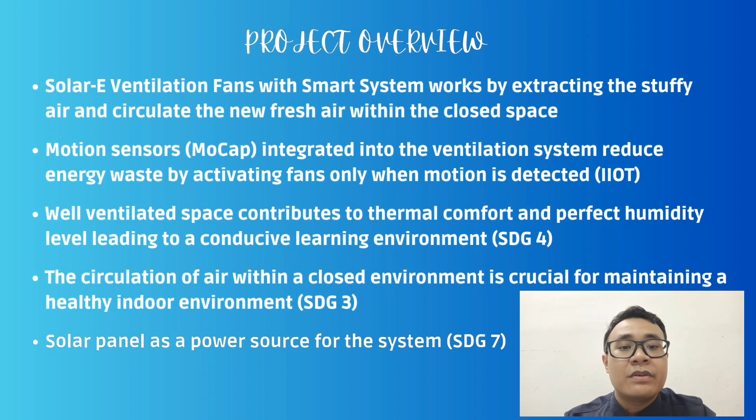To address the concern about energy efficiency, we also incorporate a motion sensor, or MOCAP, into our solar e-ventilation fans. Additionally, these fans also utilize solar panels as their power source, aligning with SDG Goal 7, affordable and clean energy.

Good day, doctor. I'm Sangeet and my matric number is 21110768. I would like to explain the problem statement according to research that has been done regarding the ventilation system in MASDAR mini library. MASDAR mini library presents several significant challenges that need to be addressed.

Firstly, MASDAR mini library has a louver type window for natural ventilation. The conditioned air from the air conditioning system will escape through the open windows, leading to insufficiency in cooling the space. This results in wasted energy and increased electric bills for MASDAR management, as the AC unit works harder to maintain the desired temperature.

The existing ventilation system is outdated, resulting in insufficient circulation and filtration. Additionally, there have been reports of poor air quality, which has thus accumulated musty odors, particularly in less frequented areas of the library. Moreover, the compact layout of MASDAR mini library poses constraints on available space for installing a ventilation system. With limited space, finding a suitable location for equipment placement becomes challenging.

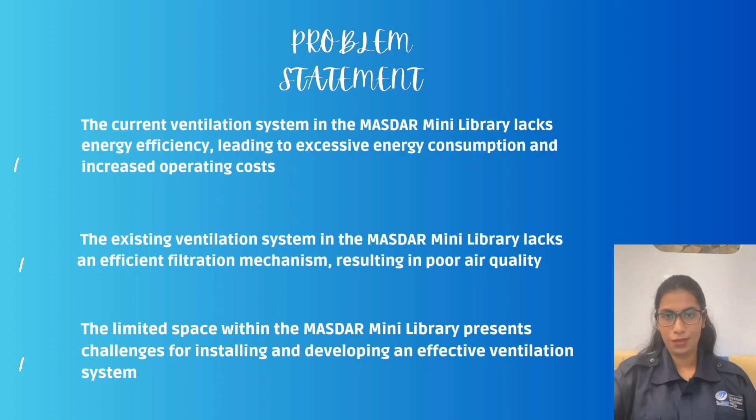Thank you. My name is Navnithan, son of Karimutu, matric number 21113313. Today I will explain the objectives for our product. The first objective is to develop an energy efficient ventilation system to reduce excessive energy consumption and operating costs.

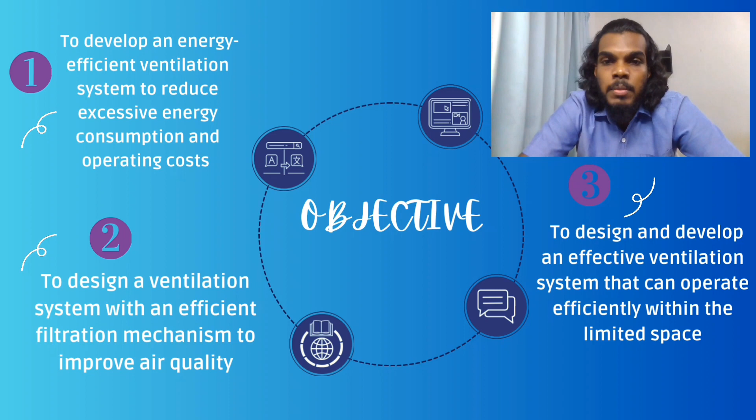The second objective is to design a ventilation system with an efficient filtration mechanism to improve air quality. The third and last objective is to design and develop an effective ventilation system that can operate efficiently within the limited space.

Now I will talk about the scope for our product. The first scope is that the ventilation system is powered by solar energy. The second scope is to improve air quality in the mini library to create a healthy and pleasant environment for reading and studying. The third scope is to maintain a comfortable temperature for librarians in the mini library. The last scope of our product is that the total square footage of the library space will influence the amount of ventilation needed.

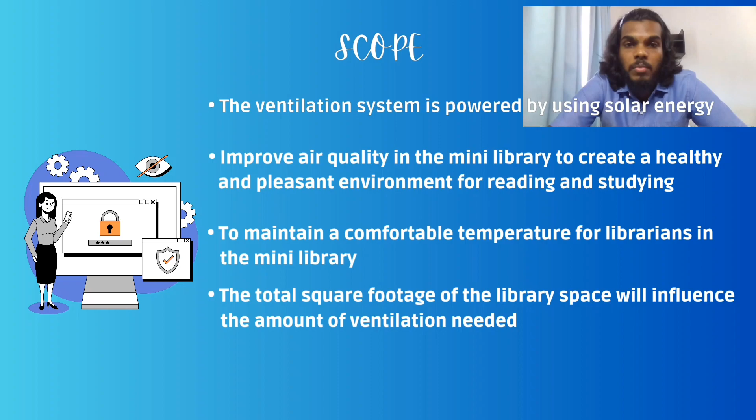My name is Nur Nadila Hani binti Razali. I want to explain about existing products. The first product is the KDK glass mount propeller fan, and it exhausts pollutants directly outside before spreading them throughout the rooms. The model is 20WUD, the voltage is 220 to 240 volts and it operates at 50 Hz.

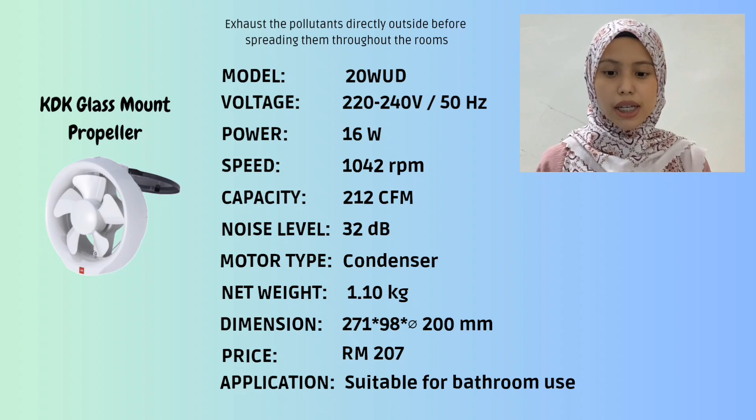The power is 16 watts. The speed is 1042 RPM. The capacity is 212 CFM. The noise level is 32 dB. The motor type is condenser. The net weight is 1.1 kilogram. The length is 271, the width is 98, and the diameter is 200 millimeter. The price is 207 ringgit and it is suitable for bathroom use.

The second one is the KDK ceiling mount propeller. It is installed on the ceiling to provide effective air circulation throughout the area. The model is 20TGQF. The voltage is 220 to 240 volts and it operates at 50 Hz. The power is 20 watts. The speed is 1250 RPM. The capacity is 312 CFM.

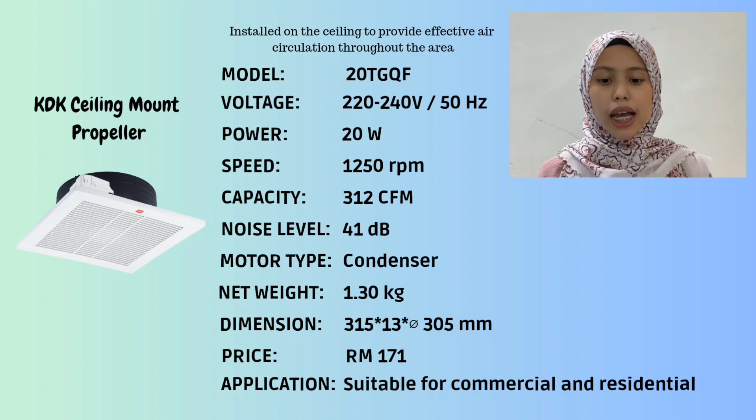The noise level is 41 dB. The motor type is condenser. The net weight is 1.3 kilogram. The dimension, which is the length, is 315 millimeter. The width is 13 millimeter and the diameter is 305 millimeter. The price is 171 ringgit and it is suitable for commercial and residential use.

The last one is the KDK glass mount propeller. The ventilating fans keep air circulating in rooms, exhaust contaminated air, and remove offensive odors. The model is 20AQM8. The voltage is 240 volts and it operates at 50 Hz. The power is 18.3 watts. The speed is 1301 RPM. The capacity is 318 CFM.

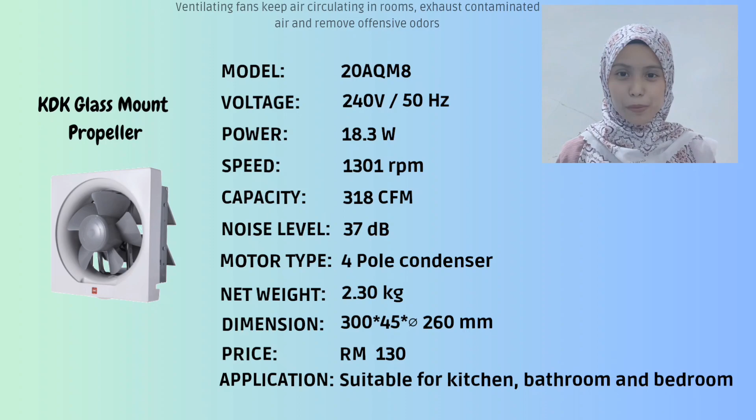The noise level is 37 dB. The motor type is 4-pole condenser. The weight is 2.3 kg. The length is 300 millimeter. The width is 45 millimeter and the diameter is 260 millimeter. The price is 130 ringgit and it is suitable for kitchen, bathroom and bedroom use. In this market survey, we got about 50 respondents.

In the first question, 31 of the respondents agree that fixed ventilation systems are effective in improving air quality and comfort in the library. However, 18 of the respondents are neutral and one respondent disagrees about the fixed ventilation system.

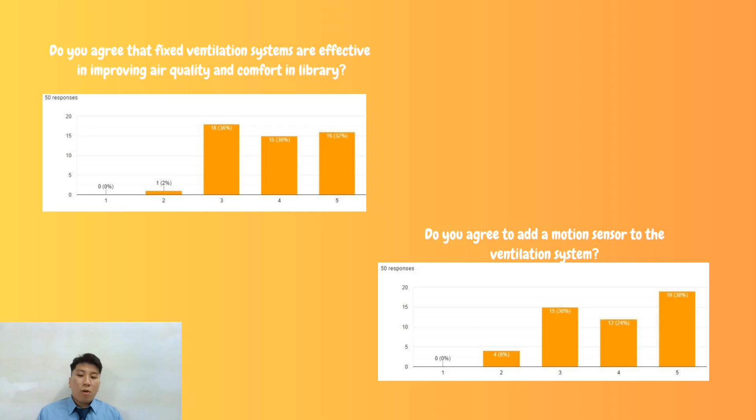For the second question, 31 of the respondents agree about adding a motion sensor to the ventilation system, followed by 15 neutral and 4 who disagree about adding the motion sensor.

For the third question, 36 of the respondents agree that solar energy should become the power source for the ventilation fan in the library. Only 14 of the respondents are neutral with the suggestion.

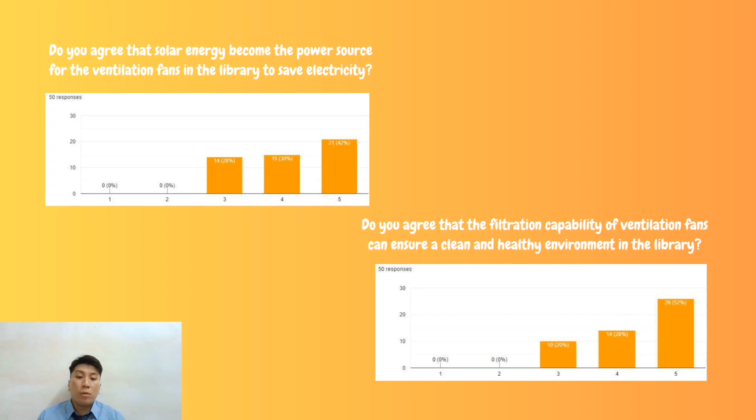For the fourth question, 40 of the respondents agree that the filtration capability of the ventilation fan can ensure a clean and healthy environment in the library. Only 10 of the respondents are neutral with the suggestion.

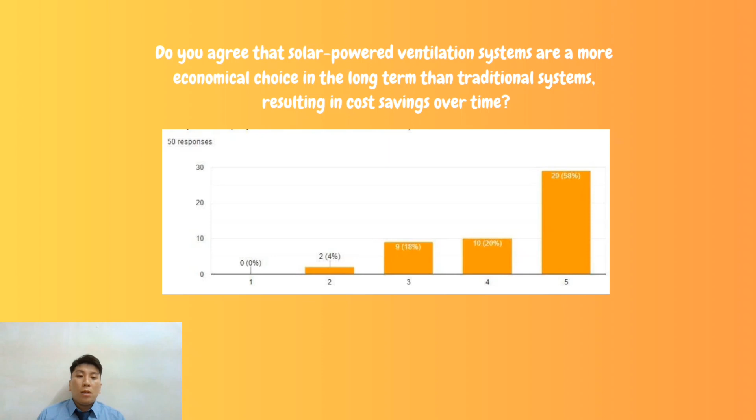For the last question, 39 of the respondents agree that solar power ventilation systems are a more economical choice in the long term compared to traditional systems. 9 of the respondents are neutral and 2 disagree about the solar power ventilation system.

Based on our customer requirements, the first factor is that air ventilation fans should be able to be fixed to the wall to save space, because we have to focus on utilizing fixed wall-mounted ventilation fans in the library, emphasizing the need for a practical solution. The second factor is that a motion sensor must be included.

Implementing a motion sensor in the ventilation system for the library optimizes energy efficiency and user experience by tailoring the ventilation to real-time occupancy.

The third factor is solar power generation for sustainability, because prioritizing energy efficiency in the air ventilation system for the library minimizes carbon footprint, reduces utility expenses, and ensures optimal air quality. The fourth factor is filtration capability to ensure a clean environment.

For the filtration capability for environment, the integration of advanced filtration technology in the library ventilation system enhances indoor air quality. The last factor is that it must be a reasonable price.

Based on our product, achieving a reasonable price for the air ventilation system in the library is essential for financial sustainability.

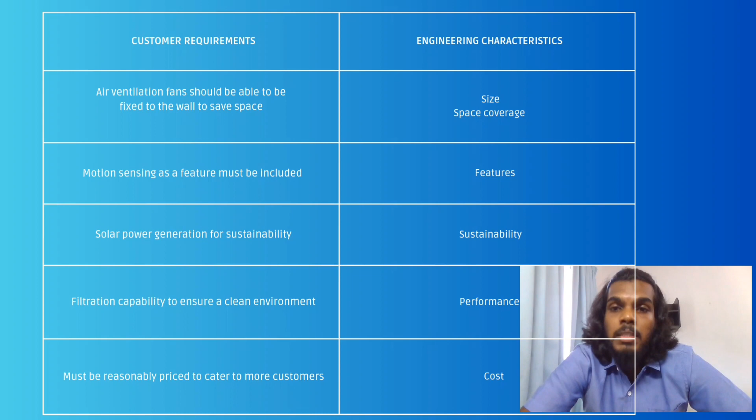Hi doctor, it's me again.

I'll be sharing our analysis from our house of quality, which provides valuable insight into our product development priority. Our customers have clearly indicated that performance is paramount, which is ranked number 1.

This means we excel in meeting their expectations for functionality, reliability, and effectiveness. Ranking second in cost underscores our efforts to strike a balance between delivering value to customers and optimizing our product expenses. We will continue to explore cost-effective solutions without compromising on quality or performance.

Ranking third in features highlights the importance of innovation, differentiation, and capturing market demands. Ranking fourth signals the need for more comprehensive

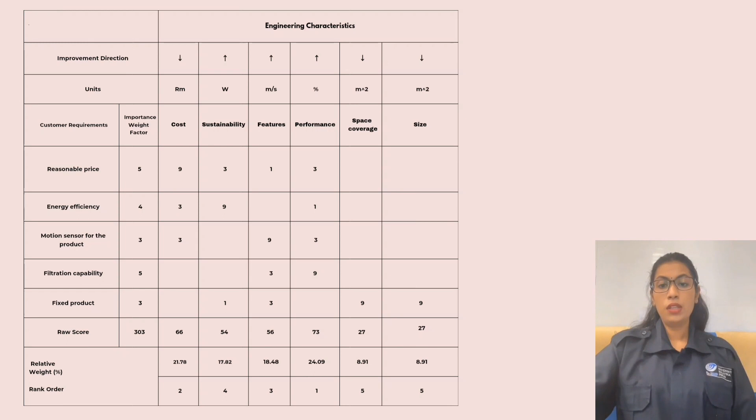sustainability initiatives. We are committed to reducing our environmental footprint and promoting sustainable practices throughout our supply chain and product lifecycle. Ranking fifth in this category indicates an area for improvement in optimizing product dimensions to better suit customer needs and market trends. Thank you.

Firstly, our market identification: we targeted our market toward education institutes, households, and companies. Our competitive products compared with our product are traditional ventilation and other smart systems.

Next is product identification. The name given to our product is Solar-E Ventilation Fan with Smart System. Its basic function is to circulate air inside a closed environment, regulated by a motion sensor to minimize energy consumption.

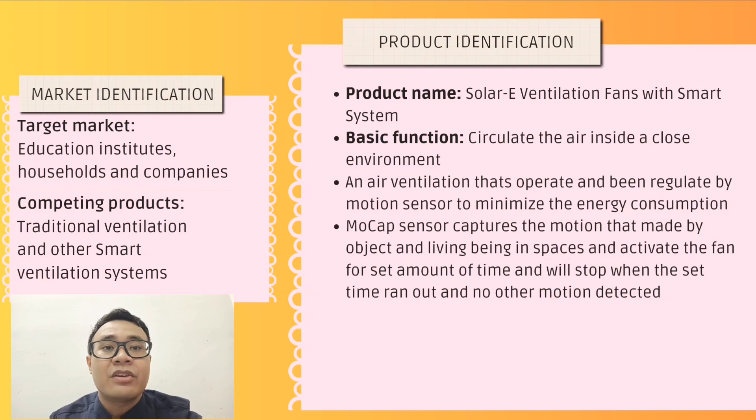The motion sensor captures the motion made by a living being or an object in the room, and then it will turn on the fan for a set amount of time. The fan will stop after the set time runs out and there is no longer motion detected in the room.

Next is financial requirement. The target manufacturing cost is estimated to be around RM 451 to 600, and we also offer a 3 month warranty. Expected financial performance is to be determined, and level of capital investment is still to be determined.

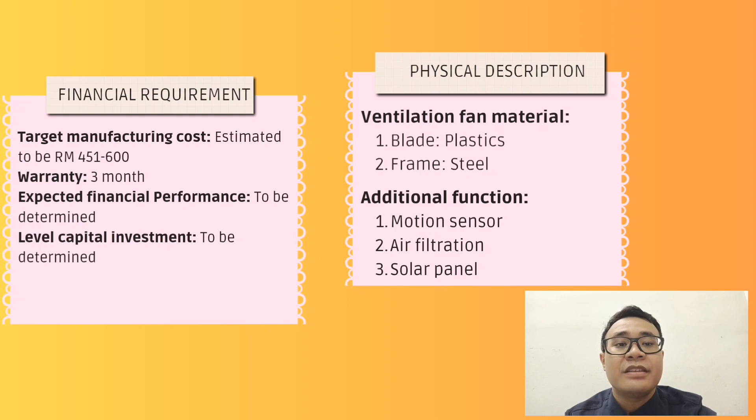Lastly is physical description. The blade of our product is made out of plastic and its frame is made of steel. Its additional functions are motion sensor, air filtration, and solar panel.

In conclusion, the air ventilation update for MASDAR will give the student the needed quality of learning experience. That's all for our presentation. Thank you.